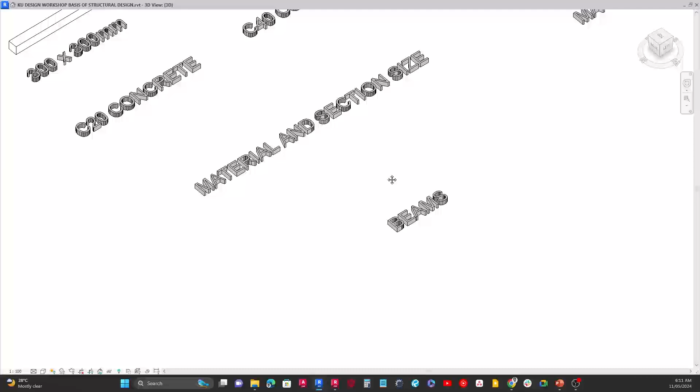All right, okay, so let's go ahead and continue. We're going to start with beams. Now many of us have actually come in contact with beams before. You've probably seen, maybe in a large classroom, a beam just spanning across the whole building from the top, as if you're looking at the ceiling. What a beam ideally does is carry some of the loads from the building, such as the slabs. So for instance, if you're on a top floor, on a suspended floor slab...

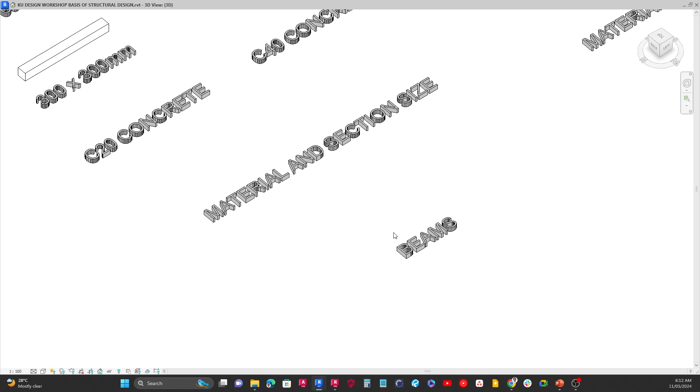A suspended floor slab could be something like this, for instance. You can see that this slab is actually carried by a beam. These beams basically carry the majority of the loads of the slabs, and then transfer it to the columns, which send it to the foundation. That's one of the simplest ways to explain load takedown.

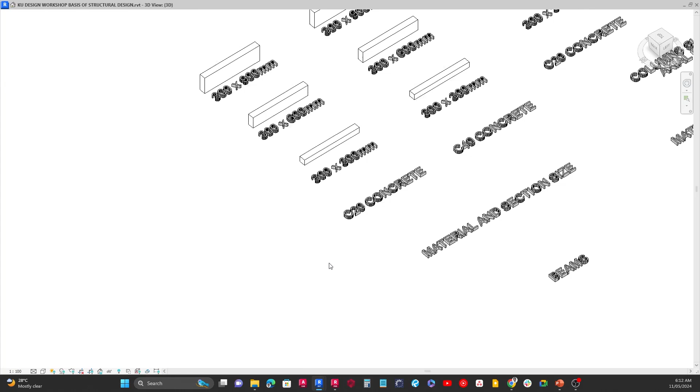So let's understand how beams work. I'm going to start here with material and section sizes. Beams can come in different sizes.

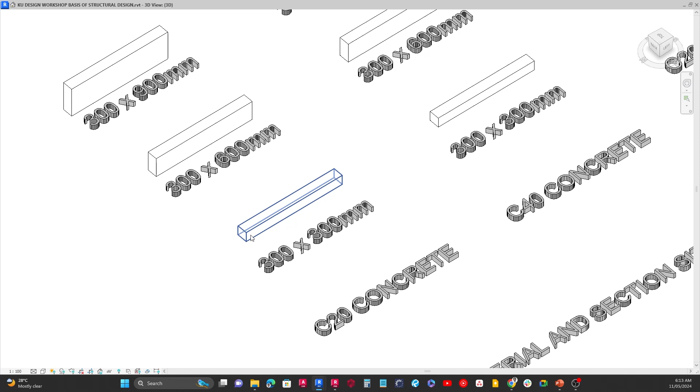Here we have beams of different sizes: a 300 by 300 mm beam, a 300 by 600 mm beam, and a 300 by 900 mm beam. Notice that it is increasing in depth—this one has a 300 mm depth, this one has a 600 mm depth, this one has a 900 mm depth. Likewise the same thing on the other side towards the right.

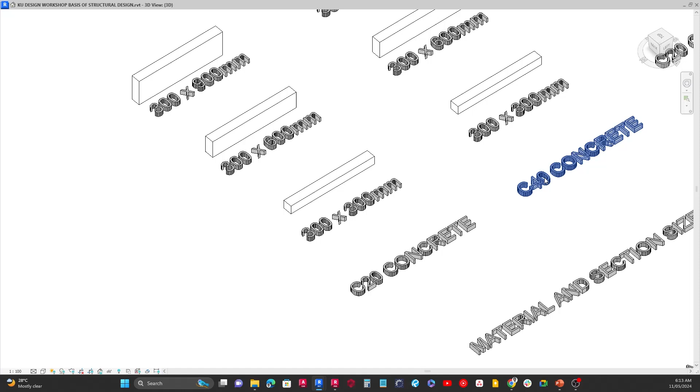But you can see these two have different materials. This one has a C20 concrete material type, this one has a C40 material type. This is what we refer to as grades of concrete. To explain it in the simplest terms, the higher the number, the more the cement ratio in the concrete—that's the best way to explain it.

If you've done materials in school, probably in your second or first year, you know that cement, being a binding material, tends to make the material stronger, especially when it comes to the elasticity modulus or the strength of the material itself.

We have different grades of concrete, from C16, 20, 25, 30, 35, 40, all the way to 60, 90—those are higher grades of concrete. Now we need to understand the reason for picking a particular material for concrete. Let's look at it in this way.

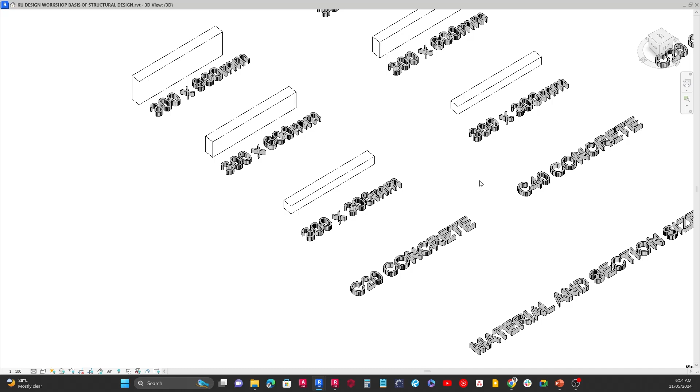Let's compare these two concretes together. We have one of 300 mm, and another one of 300 mm. I'm going to isolate this in my application, since I want to make sure this is as practical as possible. If you have any questions, just let me know.

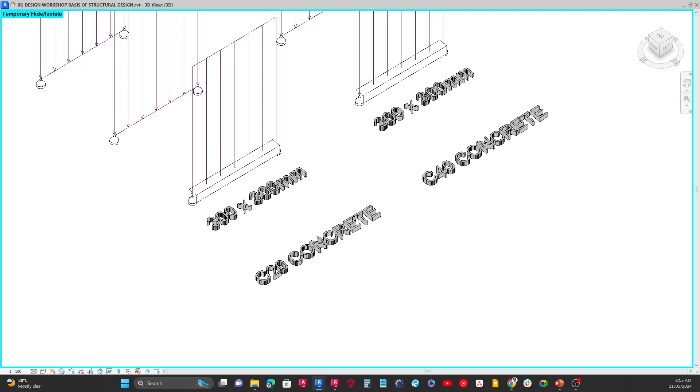Now I'm just going to come over here and show you some of the analysis details. Okay, give me a minute, just want to set something up to make it a little bit simpler to view. Oh, okay, sorry about that—so I should ideally be showing you another screen.

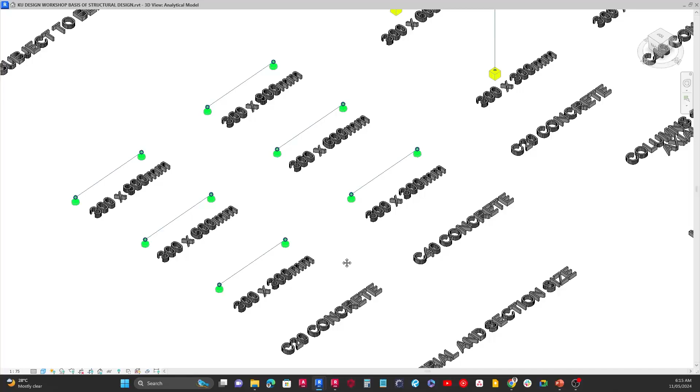Okay, yeah, better—this is what I want to show you. I want to ask, since we're all familiar, especially if you started doing this in school, with structural analysis—free body diagrams such as this. I want to ask if you're familiar with this.

Just want to ask if you're familiar with this, just let me know by a response in the chat box. Deborah said yes. Okay, great, thank you, let's just be certain. Monet said yes as well. Okay, great, so this is vital.

You'll notice that this is one of the first things we do in school once we start our core engineering and civil engineering course in structures. We have to assume the structure is a free body diagram like this. So if it's going to be a beam, it will most likely be a horizontal member such as this, and it will have supports at the ends. All right, now let's assume we've gone ahead to analyze it.

Now this isn't a program about analyzing structures, but if you're interested in that, just let me know and I'll send you guides and resources to learn on that. Okay, now let's go ahead and look at how this thing works.

What you will notice is that between the two differences with materials here, the one with higher material strength would more likely have smaller displacement—meaning it's not going to show visible displacement when loaded. I'll show you a good representation. So let's go ahead and look at the displacement on this structure. I'm just going to turn on the diagram to see that.

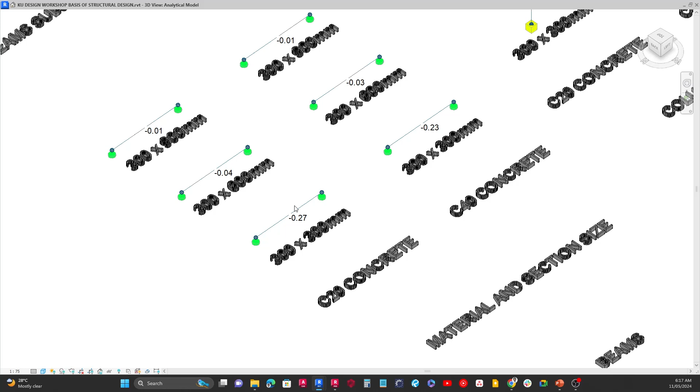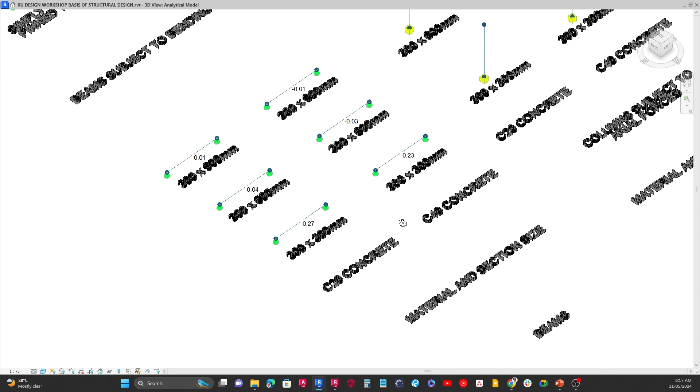So all of these structures or beams have been loaded, and now you can see that they have displacement values towards the center of the beam. For instance, even though this beam here is a 300 by 300 and this one is also 300 by 300, you can visibly see that two of them have different displacement values. One here has 0.27, measured in millimeters.

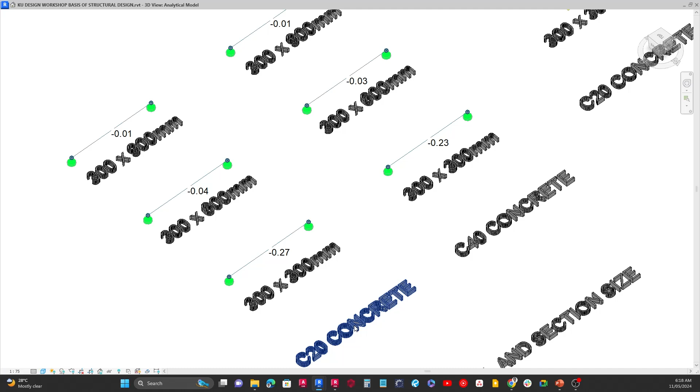So in this sense, materials or members with a lesser grade of concrete are going to have larger displacement. This is about 0.27 mm displacement compared to this 0.23 mm displacement, just because of a change in material.

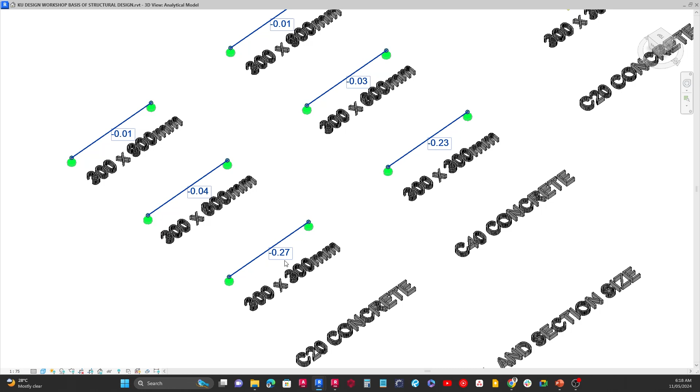I can see the same thing in different sections, but notice that the larger the section, the smaller the displacement. The larger the section, the smaller the displacement. Just to show you how that looks, let's go back and look at the physical elements.

Let's go and come back and reset this. So we can see here that this one is now thicker than this one over here, meaning that these ones have a better performance in resisting loads without having large displacements. That's exactly how it works.

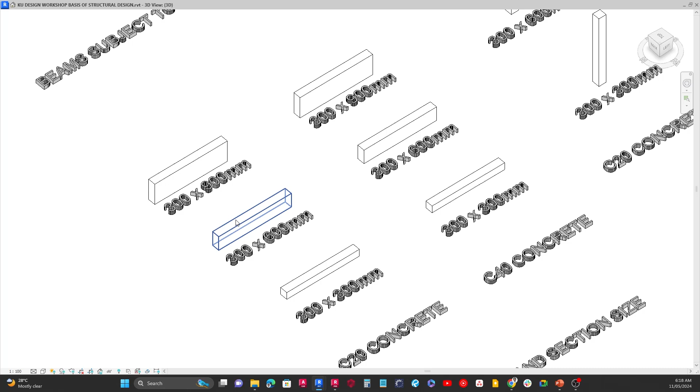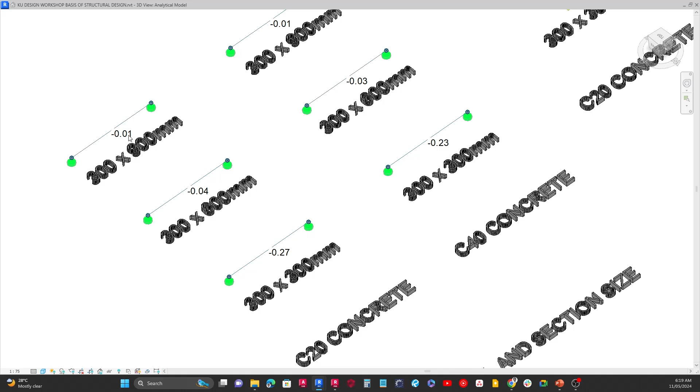And then the larger it is, you can see here 600 compared to 900. If you come back to look at the analytical model, you can see that this one is almost negligible, about 0.01 mm in displacement. So that's a good way to illustrate the difference between materials and properties.

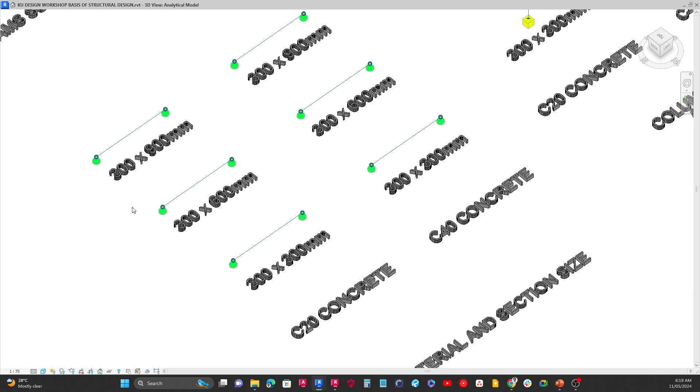Now, displacements are not the only things we check when dealing with beams. We also want to check other things such as bending moments. Bending moments are mostly what we use in the design of horizontal members such as beams. Let's go ahead and look at it.

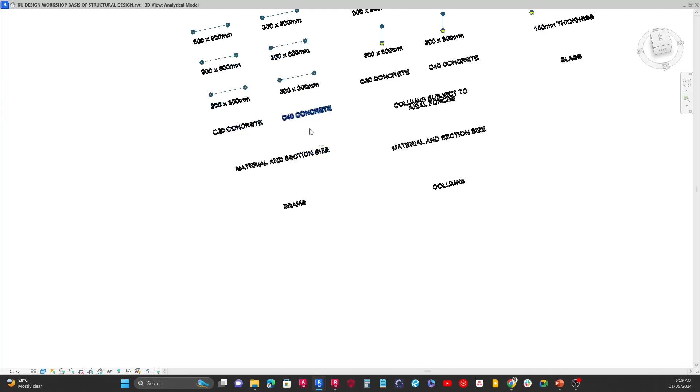I'm going to come and just isolate this up. If you're wondering what software I am using to do this, this is Revit. We'll get to a point in the training where I actually show you how to do things such as this.

All right, good. So now let's go ahead and look at the moments for these beams. Let's start with this one. I'm going to turn on the moment for the beams.

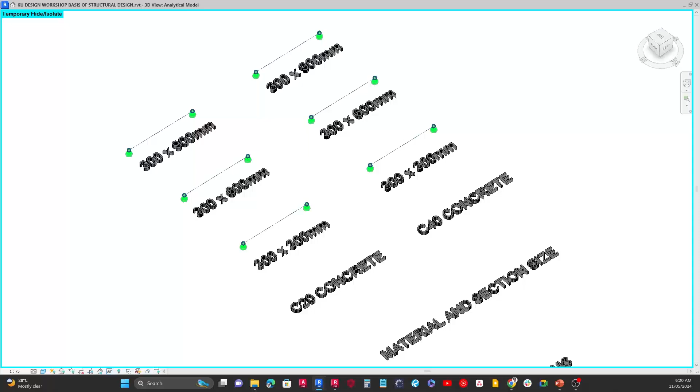By the way, I have a model that I'm working on my second screen to show some of these results, but I want to make sure it's not overwhelming, so I've decided not to cover how I'm doing this right now. All you need to do is focus on what is happening. Let's go over here, I want to look at the moment on the beam.

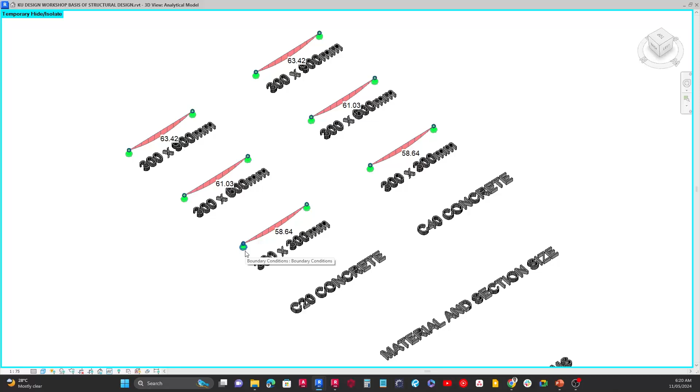All right, good, so it's loaded. Let me increase the scale a bit so we can see this better. So we can see here that this is the moment generated on the beams, and you can visibly see that all of these are simply supported beams, meaning they have one support on one side and another support on the other side.

We can see that even though these two beams have the same section but different materials, they will still have the same moments. So the material ideally does not affect the bending nature of the beam. It would affect the displacements but not the bending.

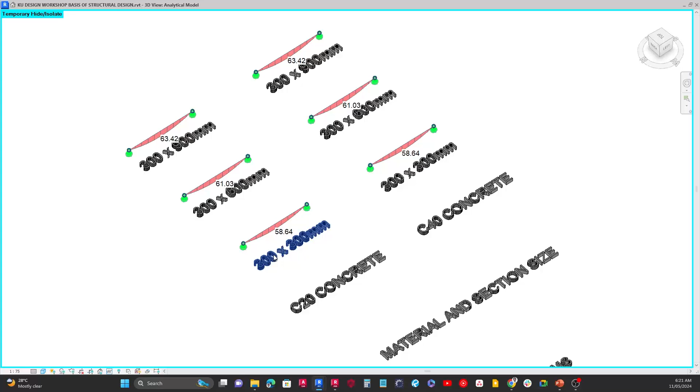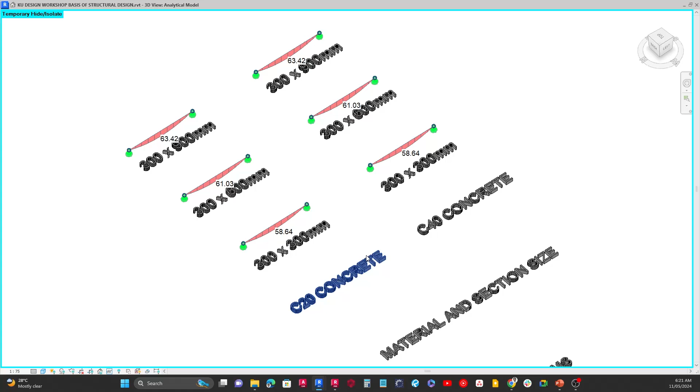So that's why most of the time when a designer is designing a building and let's say this 300 by 300 mm is not passing, he may just decide to opt for a larger section instead of increasing the material, because increasing the material will come at a higher cost, it will be more costly. So that's exactly how it works.

You'll notice that the moments increase with a larger section. For instance, this 300 by 300 compared to the 300 by 600 has a larger moment. Now, this doesn't mean it cannot carry the loads, it just means the moment generated is larger because the section is bigger.

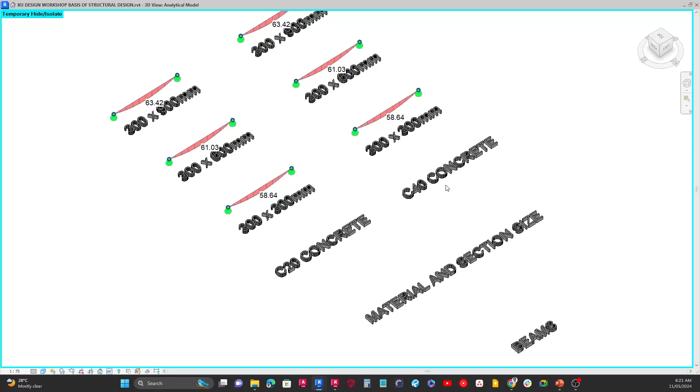Likewise, with 300 by 900, you can see the moment has increased, and it's the same even though the materials differ. So that's a bit about looking at some of the parameters for beams and the nature of how they behave.

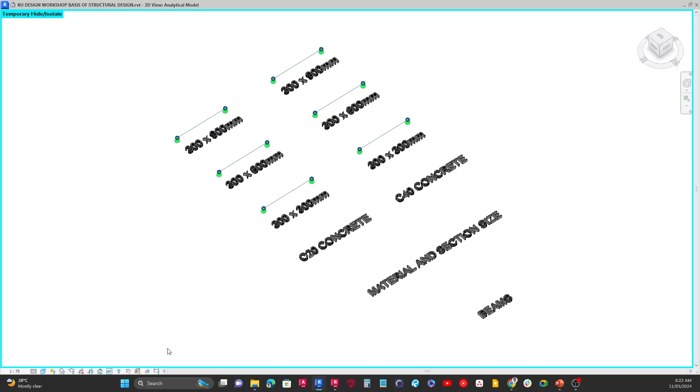All right, good. Now let's talk about beams subject to bending. Okay, now let's go over here. We are going to be looking at simply supported beams. So before I continue, I really don't want to make so many assumptions.

If you are familiar with simply supported beams, that's how a beam is being supported. Just let me know - if it's a yes, let me see that in the chat box, if it is a no, let me get that in the chat box as well. So if you are familiar with how a beam is supported, let me know.

All right, so Deborah said yes. Okay, Juma said no. Okay, all right, great. All right, Monet said yes. All right, great. Okay, Antonio said yes.

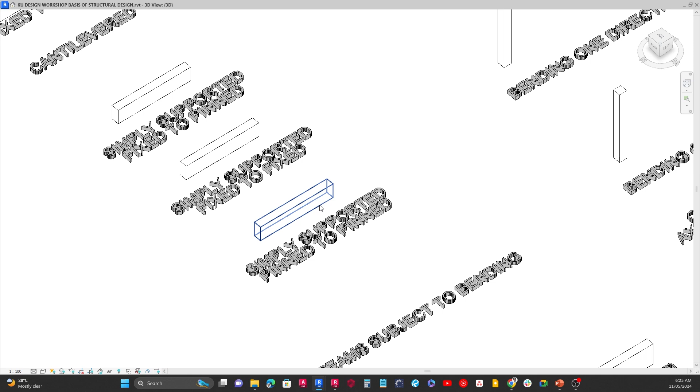Okay, all right, great. So for the sake of those that didn't actually understand, let's explain how it works. So we can see that over here we have a beam. Now let's look at something in this nature over here.

If for instance I had this structure, let me go ahead and delete it for explaining it in a better way. All right, let me just delete this. I'll bring it back. Okay, so look at this beam over here.

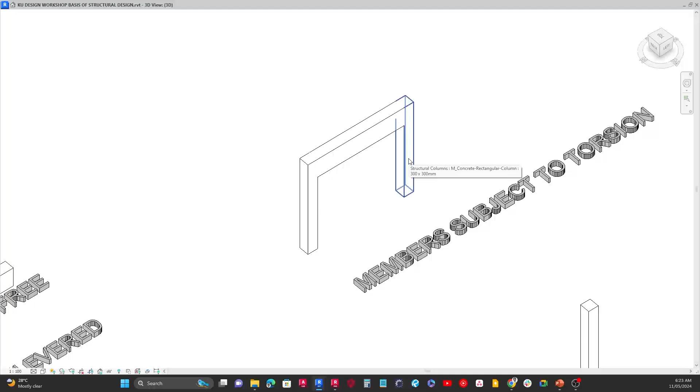When we say a beam or a structure or element is simply supported, it means that it is supported on both ends like this, right? So this is what it means for a beam to be simply supported.

Now, when we say a structure is cantilevered, it means that it is only supported on one end, so it's going to look something like this, meaning that it is supported just here, but it's not supported on the other end. Okay, so just use that small illustration.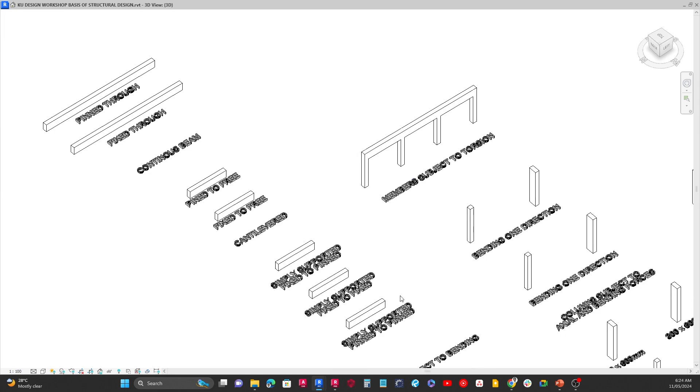Let me bring this back here so we're not missing it when we need it later on. All right, great. So this here is a simply supported beam. And now beams also have what we call support conditions.

Now, understanding support conditions is something we may not cover in today's course. Support conditions basically define how the structure is going to behave and its stability as well. You would also notice support conditions will determine whether a building will be statically determinate or indeterminate in nature. We don't want to go too deep into that here, but it actually affects how the structure behaves when you look at the analysis.

So let's look at this one here. Let's assume it is pinned to pin - so both ends, the first support is pinned, the second support is pinned as well. What that means is that it is restrained in two directions, but it is allowed to rotate at both ends.

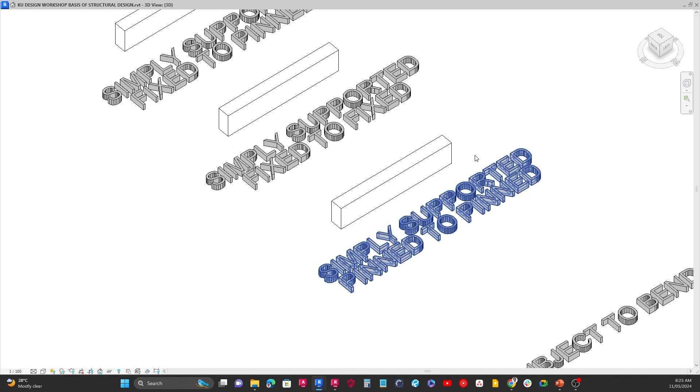So that means for this point here, it's restrained in the Z direction, and it is restrained here in the Y direction. Likewise, it is restrained in the X direction, in the Y direction, it is restrained in the Z direction, but it is allowed to rotate, meaning it can rotate like this and like this at this end. So that's what it means for it to be pinned to pinned.

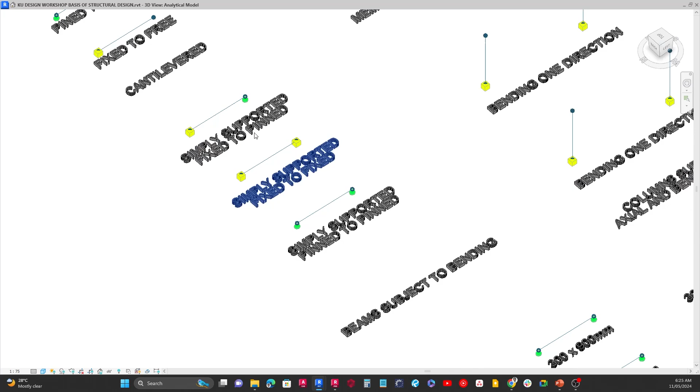So let's look at its resulting analytical model. Let's go back here, for instance - beams subject to bending. Let me go ahead and isolate these elements. All right, good.

All right, great. So let's go ahead and look at its bending. Just like we saw before, I'm going to turn on bending over here.

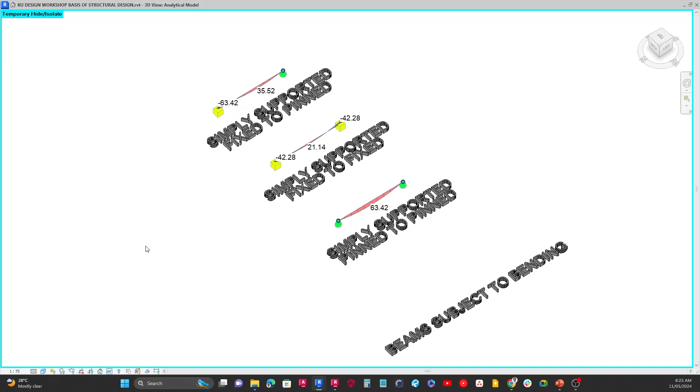All right, great. So we can see here that the one that is simply supported pin to pin, we can see that we have the maximum bending at the center of the beam, right? Can we see this? The maximum bending at the center of the beam.

Let me see who can guess what the formula is for calculating the maximum bending in the simply supported beam. If you know that, type it out in the chat box. Let's see our academics over here. If you know the formula for calculating the maximum bending at the center of the beam, you can type it out in the chat box.

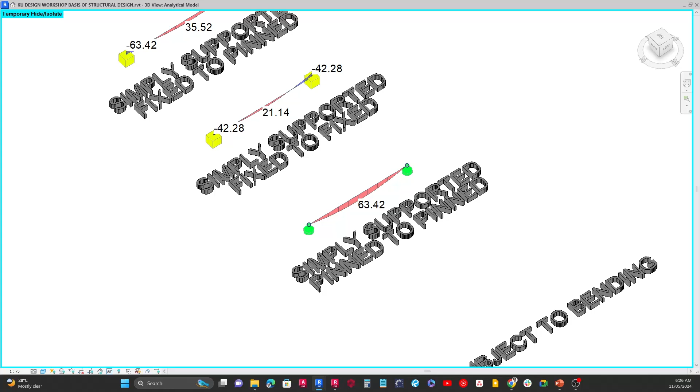Okay, so let me go ahead and increase the scale. I want to make sure that we can see this a little bit better. Very good, all right, great.

So we can see here we have 63.42, and this is based on a load that is actually applied on the beam. We can see there isn't anything where it is supported - this is a pin support, and this is another pin support, so you can know by the icon. There isn't any moment generated here because it is free to rotate.

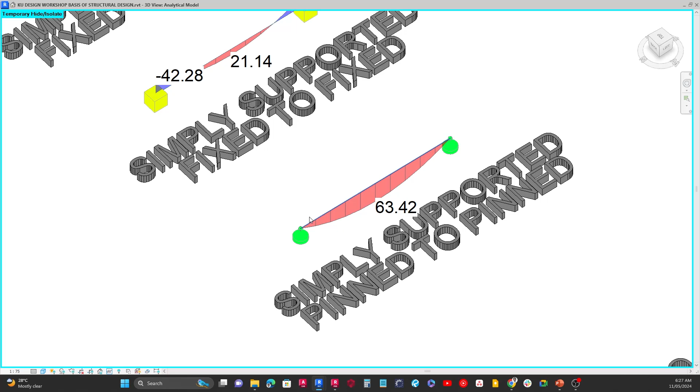Okay, but let's look at something else here - simply supported fixed to fixed. So if this one is pinned here, this icon here is referring to a fixed support. Now a fixed support ideally means it is restrained in both Y and Z direction, and rotation is not allowed as well. Wherever rotation is not allowed, moment will be generated at that support.

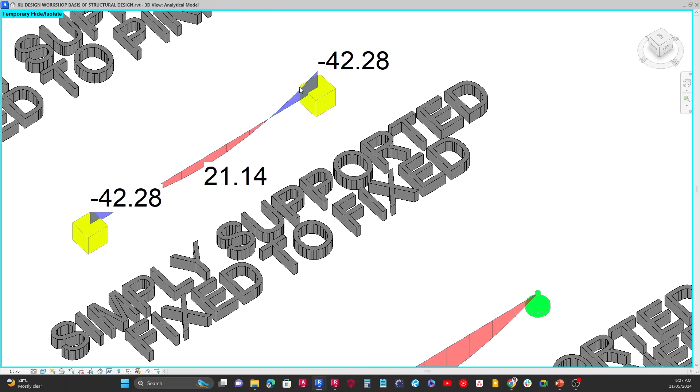I can visibly see here that there is moment at the support, and you can see through the nature of the bending diagram - compared to when it was pin to pinned, the moment at the middle of the beam here is smaller compared to what it is at the support. Now there are other formulas as well used to calculate it when it is fixed to fixed, and there's also a formula. Okay, all right, good.

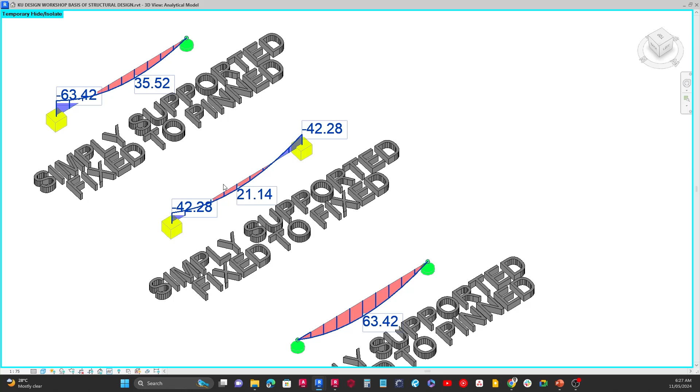Now let's look at another one here. We can see this one is another simply supported, but this time over here it is fixed and over here it is pinned, right? You can basically see a combination of everything we've learned so far. Because it is not allowed to rotate here, moment is generated at the support, but at the other pinned end here, you can see there is no moment.

Now, why is all of this vital? Most of the times when you are using software to design, you want to be sure that it is accurately depicting what you want it to do. When it comes to engineering, there's quite a lot of assumptions based on theoretical models that have been created by different people that have worked on these models in the past. You can tell by looking at the analytical models such as this that, okay, this is behaving exactly how I want it to behave. You can also use this as well to quickly check for errors in your modeling as well.

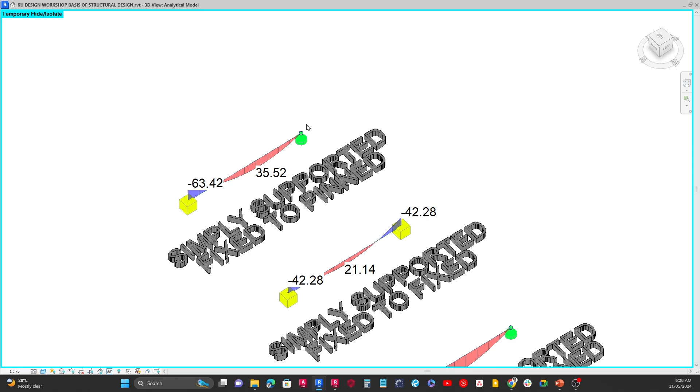So for instance, let me just give you a quick example. If I actually model the beam to be fixed to fixed, right, when I'm looking at my analytical model and I see here that it is showing this diagram, it means I may have made a design error, or rather a modeling error, by not changing this one here to a fixed support. So understanding how these structures behave under loading and how the analysis is generated is very vital.

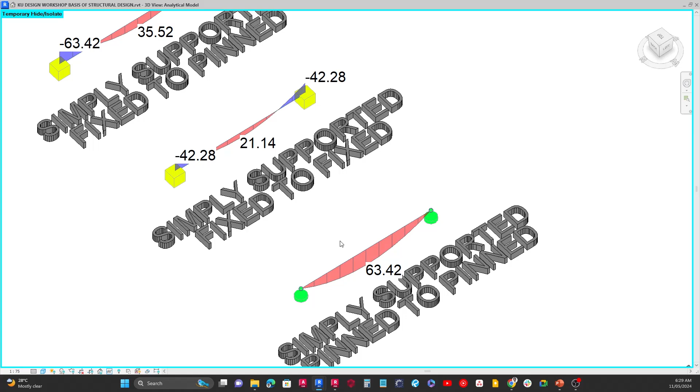Okay, all right, great. So that is just for being subjected to bending. We're going to look at another one just shortly.